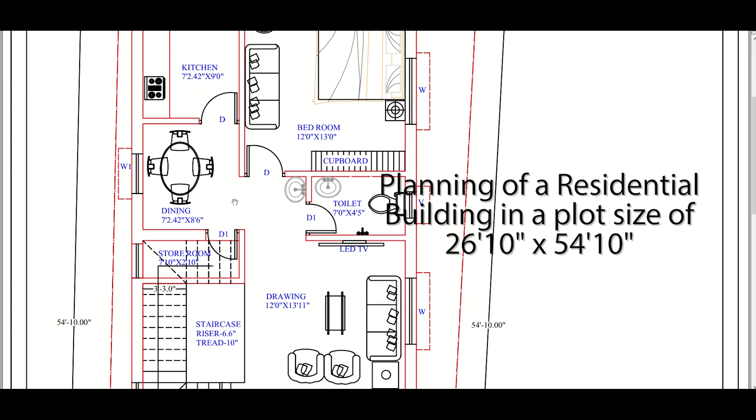In this video we'll discuss the planning of a residential building on a plot size of 26 feet 10 inch into 54 feet 10 inch. This residential plan is for one of our clients, Mr. Paramenjaya Sahu sir, and we have made the plan according to his requirements.

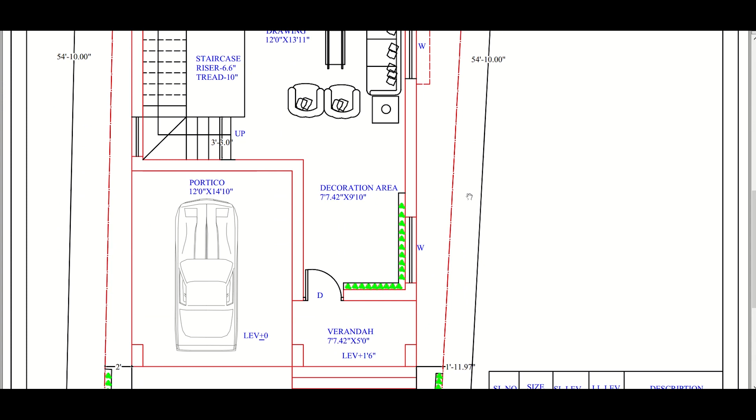The building type is G+1, that is ground floor and first floor. We have given proper setbacks in all directions. As you can see, the plot is not exactly rectangular in shape, it is curved in this portion. If you don't know what a setback is, you can watch our video on setbacks. Setback is basically the distance we leave for constructing our building from all sides.

The front setback is 4 feet, left for ventilation and looks. From the left side we have left 2 feet, and here also around 2 feet, which is 1 feet 11 and some inches. Around 2 feet setback is provided along this side, and the maximum setback is 4 feet 7 inches along our right side. The back setback is around 2 feet.

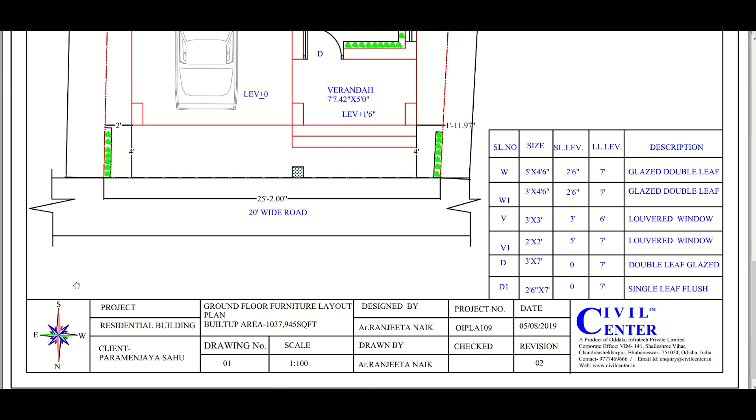As we can see, these are the directions given: south, east and west. So it is basically a north facing plot. In this north facing plot, the size of the road is 20 feet. Now the building has been constructed in an area of 21 feet 3.42 inches into approx 48 feet.

This is the ground floor plan. Let us start with the portico. The requirement was that we have to keep one four-wheeler and 2 to 3 two-wheelers. One four-wheeler can come easily in the size of 12 feet into 14 feet 10 inches.

As you know, the maximum length of a four-wheeler will be 13 feet and the width will be 7 to 8 feet, and in some cases 6.5 feet as well. So one four-wheeler and 2 or 3 two-wheelers can easily be accommodated in this portico, so this requirement is met.

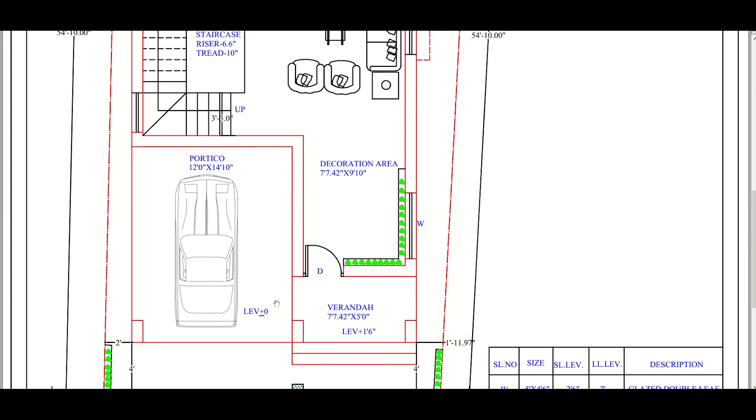We can go to the veranda directly from the portico or also through this main door. So this is our veranda, you can use this place for sitting also. We have provided 4 feet at the front of the building for ventilation, which can be used for gardening purpose also, which will improve the aesthetics of the building.

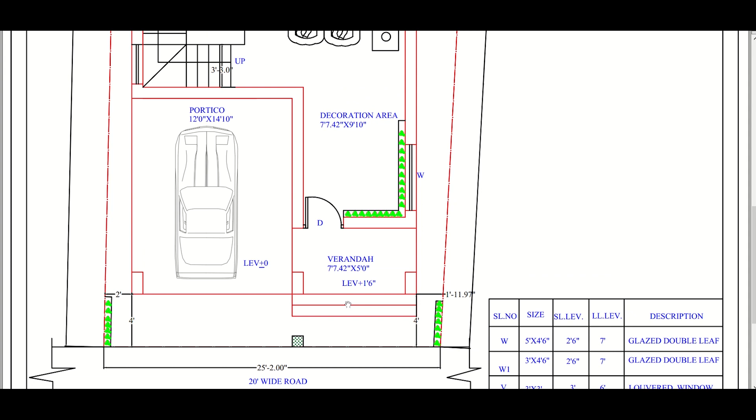As you can see, on all sides we have provided proper setback, we have not congested the building. So moving on, the person will go from the veranda to the drawing hall.

Now in front of the drawing hall we have made a decoration area and also given a window. This can be a sliding window given for proper ventilation. So this portion will be properly ventilated and light will come properly into this area.

Now after the decoration area we'll go to the drawing room. The drawing room size is 12 feet into 13 feet 11 inches. The requirement of our client was that the staircase look should be a beautiful one, aesthetically.

So the staircase, as you can see, here is the upward direction. The person will climb through stairs from here to the first floor. The look of the staircase will be a brilliant one. We will also show you the 3D view of the staircase in our further videos. This has really a magnificent look, and below this staircase, this portion can also be used for some dining purposes if required.

Now this is our staircase which gives a picturesque look to our drawing room, and this is our TV, this is a sofa, and this is another 2 sofas. If we want, we can also give a partition here for privacy.

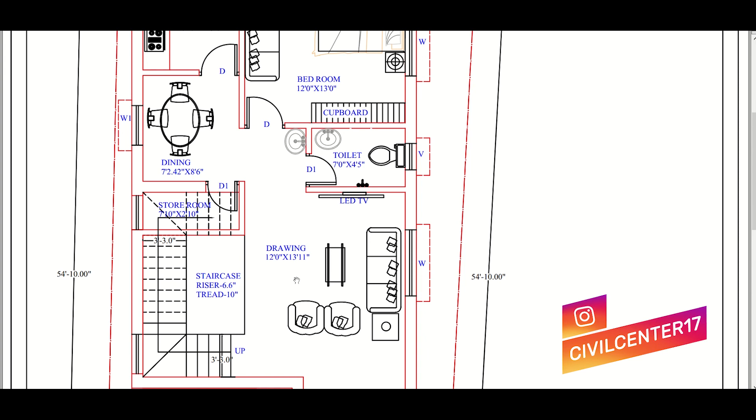Now moving on, there is a toilet. The person who comes to the drawing room can use this toilet because it is a common toilet. We also have a sink here and we have kept our commode or WC, which is our water closet, at the walls so that the plumbing pipes can come directly.

We don't want the plumbing pipes to come through this 5-inch wall. As you know, our outer walls are 10-inch and inner walls are 5-inch walls including our plaster. So we have provided our WC or water closet here, there is a tap here and there is a sink here.

Now moving on, we have also provided a storeroom under the staircase for storage purpose. Now moving on, here if we provide a partition. Now moving on, in the dining hall, we have provided it near the kitchen. So this is our kitchen and this is our dining hall, so one can easily communicate between the kitchen and the dining hall. And this is our bedroom.

Now the bedroom is in the southwest direction and our kitchen is in the southeast direction. So the directions of these two rooms are in the best position as per Vastu, which was our client's requirement: that one bedroom and one kitchen should be in the best position as per Vastu. So we have provided the best position for kitchen and bedroom as per Vastu.

The bedroom size is 12 feet by 13 feet, which is a good size for two persons living. We could accommodate a bed here, a dressing table, and a sofa. We also have a cupboard, and these are the positions for side tables and a night lamp. There is a window for ventilation here and another window for ventilation here.

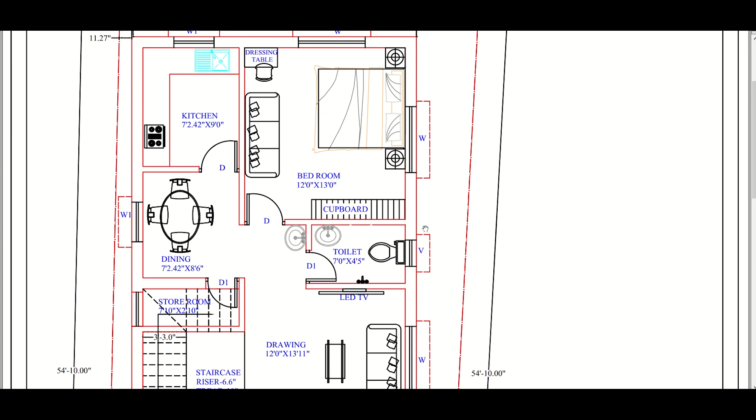For the kitchen, we have a window for ventilation on this side. In this plan, there is one toilet in this direction and kitchen in this direction, so the plumbing pipes will be in two directions. The best option for plumbing plans is that the pipe should be in a single direction, but the worst case is that the pipes are at four directions. Here we have two directions: one plumbing pipe from the kitchen and one from the toilet. So it is okay as per plumbing, and also considering the client requirements.

We have also considered the ventilation requirements, providing a sufficient number of windows with sufficient sizes so that client requirements are fulfilled. So friends, this was our plan of the ground floor.

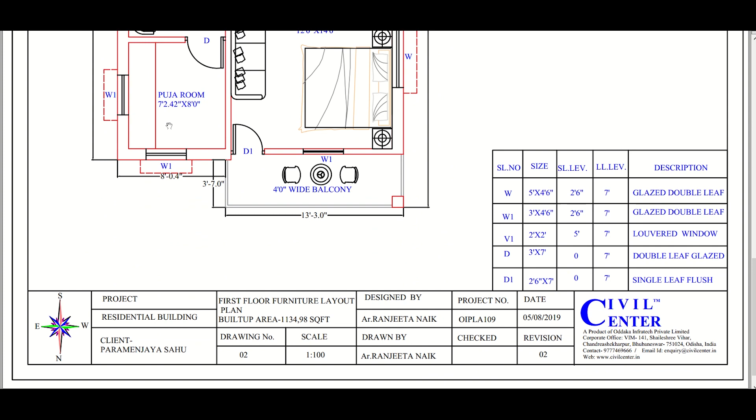Let us look at the first floor. This is our first floor plan. As per the client requirements, the puja room is in the northeast direction. This is northeast. So at the northeast corner, we have the puja room, and its size is a little bit larger as per our client's requirement. We have provided two windows so that it is properly ventilated.

We have also provided a sit-out area here where persons can come and sit. So this is our staircase. Our riser was 6.6 inches and our tread was 10 inches.

A person will come directly to our living room from the ground floor. So to the first floor, a person will come directly to the living room. So this is our living room, and this is our bedroom.

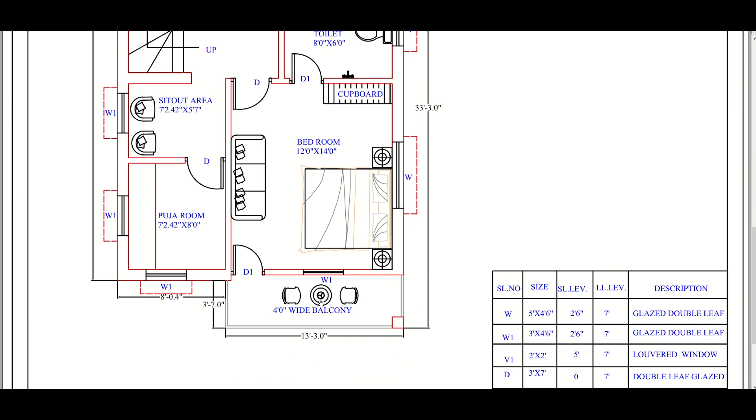Now this bedroom has one attached toilet and also a balcony, so it is in a great position, and from the front it will give a good look to the exterior 3D view. We also have a proper ventilation facility here, and the room size is quite decent, which is 12 feet by 14 feet, sufficient for two persons.

Now the toilet size is also good, which is 8 feet by 6 feet. As you know, the minimum width of a toilet should be 4 feet, so this toilet will accommodate a lot of space.

Moving on, we have provided another toilet here which is attached to this bedroom. This bedroom also has a balcony which is 3 feet 9 inches wide, and the size of the bedroom is the same as the bedroom on the ground floor, that is 12 feet by 13 feet. Only the balcony is additional, which will also be good for recreational purposes. Some persons can put chairs here and sit and enjoy the weather.

In the first floor, we also have the kitchen and dining in the same position as in the ground floor. But as you can see, in the ground floor we did not provide any door here. In the first floor we have provided a door because we want some privacy. Now we have two bedrooms with two attached toilets on the first floor.

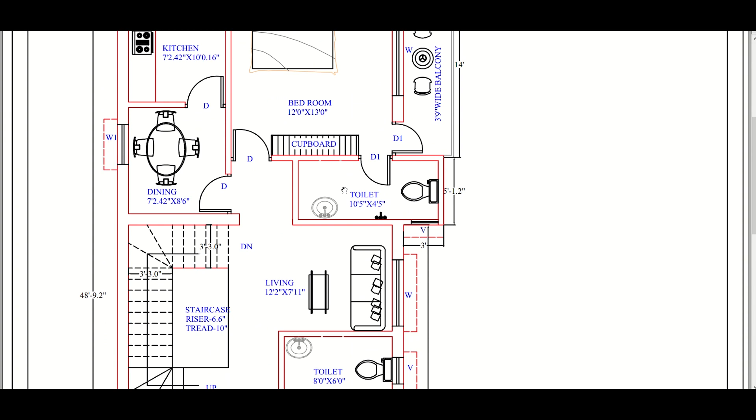In the first floor also, we can observe that the plumbing pipes will be in two directions because of the toilet and the kitchen. This is the kitchen and this is the toilet, so the plumbing pipes will be along two directions.

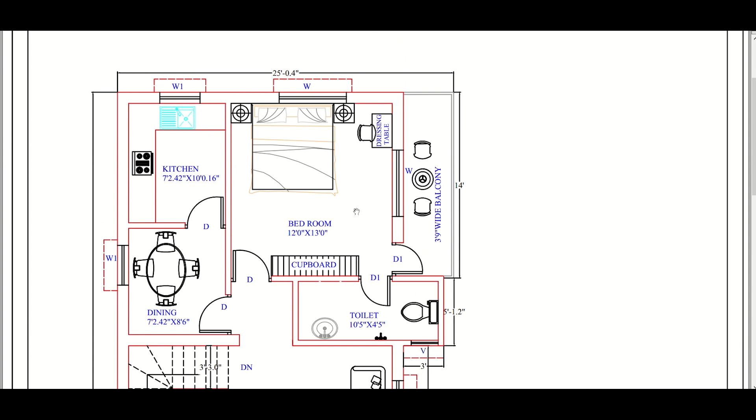So it is okay. Now, while planning this building, we had fully considered our client requirements and all the practical considerations, and made sure sufficient ventilation space was given. We also gave some importance to symmetry, that is, we considered our ground floor plan and overlapped them before making our first floor plan. So these are the things I considered before making this plan.